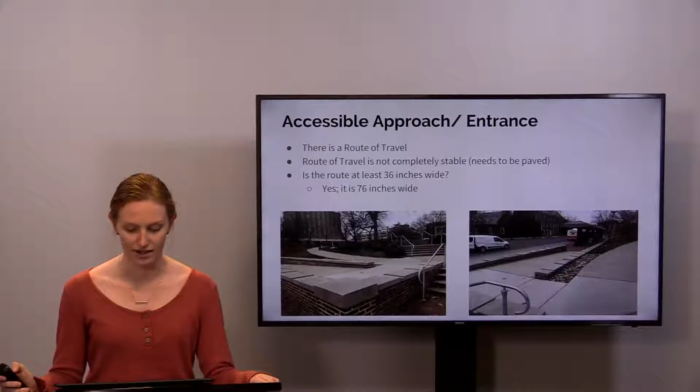First, we started with the accessible approach and the entrance, and there's a route of travel, and the route of travel is not completely stable and actually needs to be paved. The route of travel needed to be at least 36 inches wide, and this route of travel was actually 76. There are no stairs at the main entrance, so there was no need for a ramp.

There's no alternate entrance because the main entrance is accessible, and the entrance door needed to have at least 32 inches of clear opening, which it did, and it actually had 35. There's 30 inches of clear wall space on the pull side of the door, and it requires at least 18 inches. So they all worked.

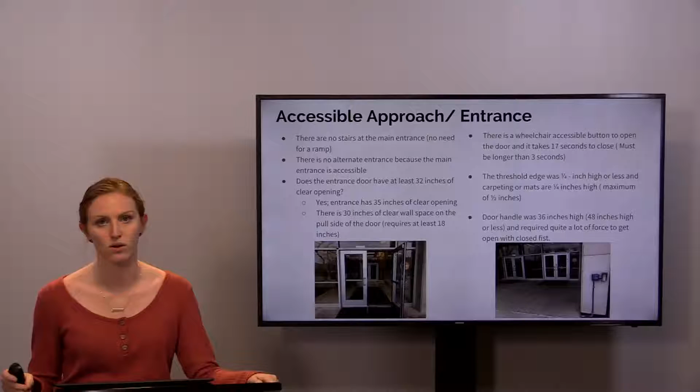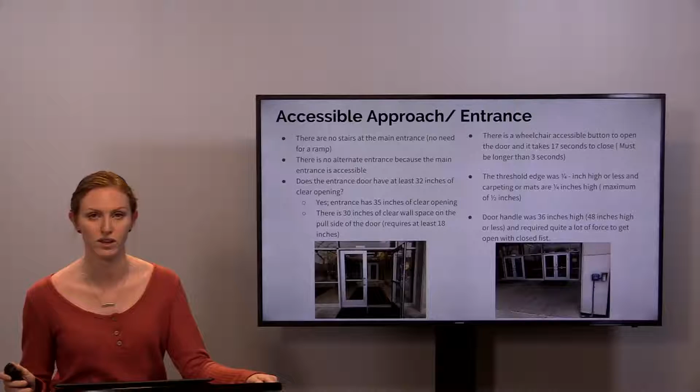There is a wheelchair accessible button to open the door, and it takes 17 seconds to close, and it had to be longer than 3 seconds, so that was really good. The threshold edge was 1/4 inch high or less, and carpeting or mats were 1/4 inches high, and the maximum was going to be 1/2.

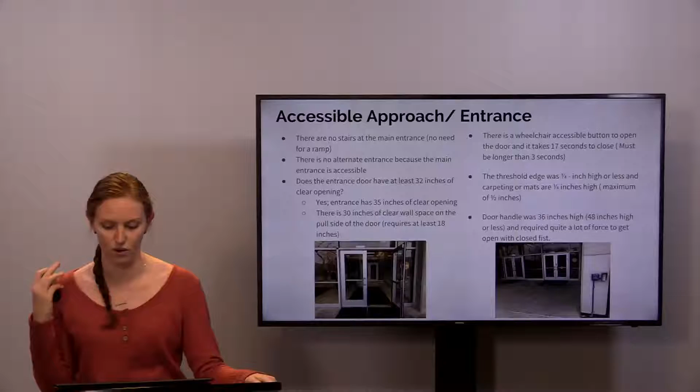So the door handle was 36 inches high, 48 inches high or less, and required quite a lot of force to get open with a closed fist.

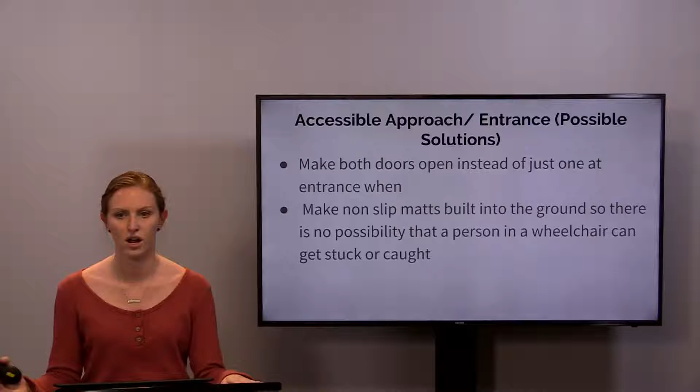Possible solutions to the problems that I faced was to make both doors open instead of just one entrance when you enter. And also, I thought to make the non-slip mats built into the ground so that there's no possible way that someone using a wheelchair could slip or get caught onto the mats.

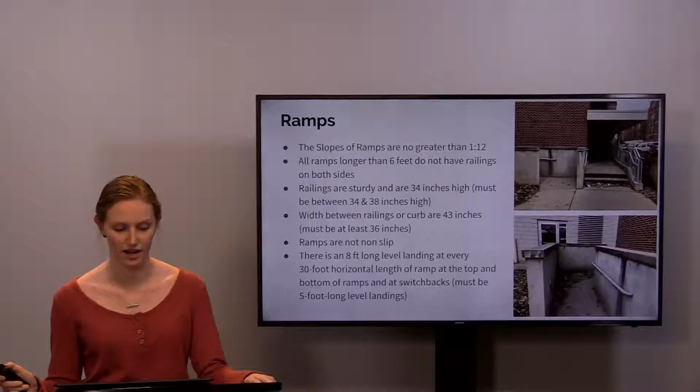The ramps were actually located when you first came in, and there was also one to get into the parking garage, and the slopes of ramps are at no greater than 1/12. All ramps longer than 6 feet do not have railings on both sides, and the railings were sturdy and are 34 inches high, and they had to have been between 34 and 38 inches high, so that met those requirements.

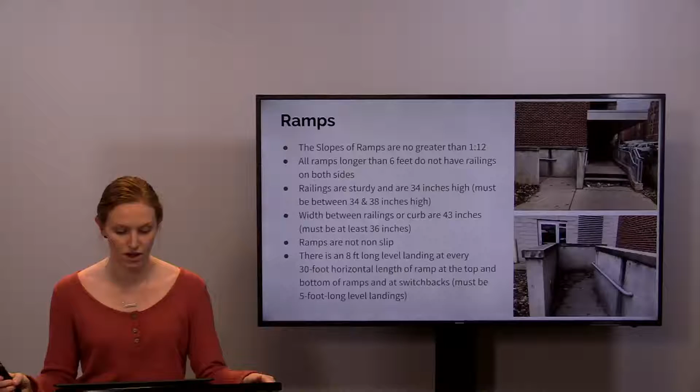The width between railings or curb are 43 inches, and they must be at least 36 inches. So those also met the requirements. The ramps are not non-slip, and there's an 8-foot long level landing at every 30-foot horizontal length of ramp at the top and bottom of ramps and at switchbacks, and they must be 5-foot long level landings, so that also met the requirements.

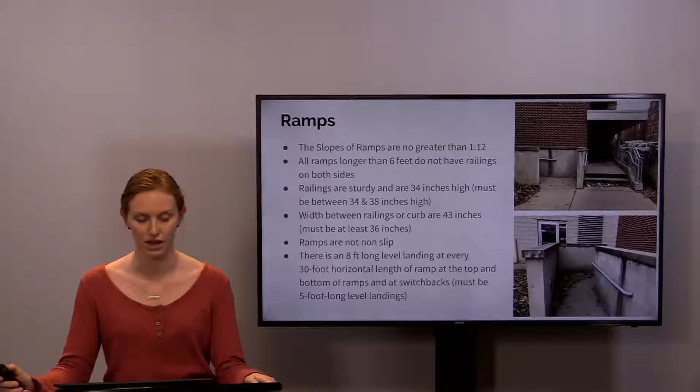The possible solutions that I found for these ramps were to add non-slip surface material that would still be good for different outdoor weather conditions, such as if it were to snow and get slippery or there would be ice. Those ramps would not be good because there's no way for someone who was using a wheelchair or a cane to not slip.

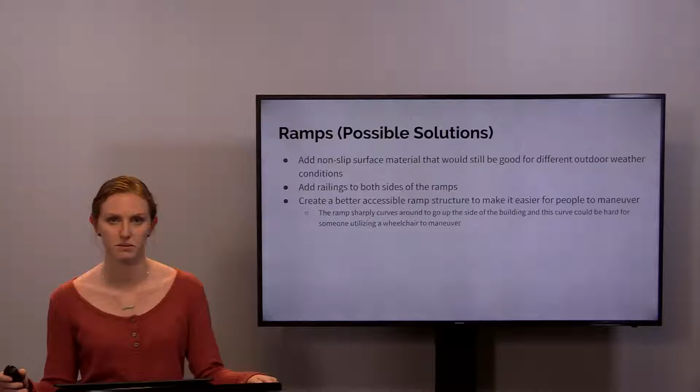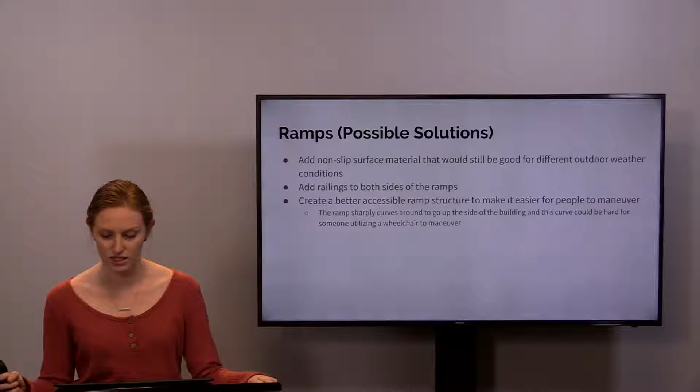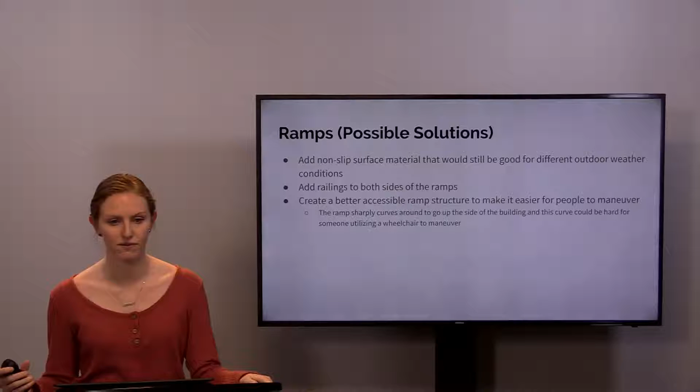I also suggested to add railings to both sides of the ramps because there was only one side that had railings, and I also suggested creating a better accessible ramp structure to make it easier for people to maneuver, because the way that the ramp was built was that it sharply curved at two different times, and I feel as though for someone using a wheelchair, this would be very difficult to maneuver.

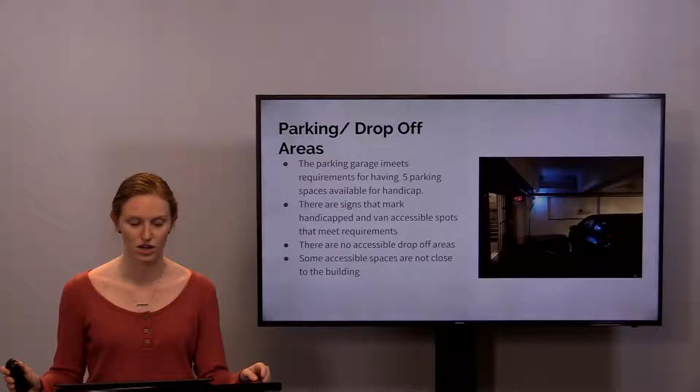The parking and drop-off areas. The parking garage meets requirements for having 5 parking spaces available for handicap. There are signs that mark handicap and van accessible spots that meet the requirements, and there are no accessible drop-off areas. Some accessible spaces are not close to the building, though, which would make it difficult for someone using a wheelchair or someone who is handicapped.

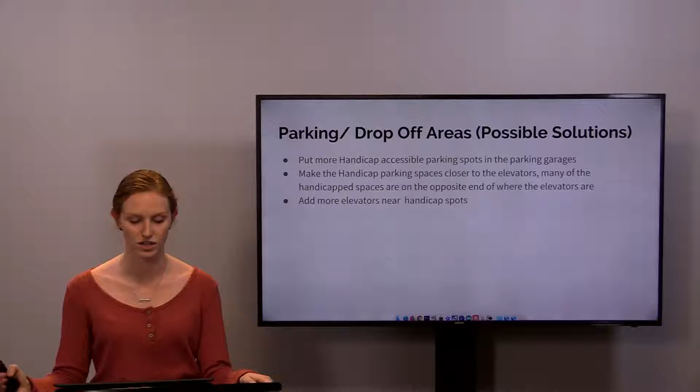The possible solutions I found for this is to put more handicap accessible parking spots in the parking garages and to make the handicap parking spaces closer to the elevators, because many of those spaces were actually quite far from the elevators, and I also feel as though if they can't do that, then add more elevators.

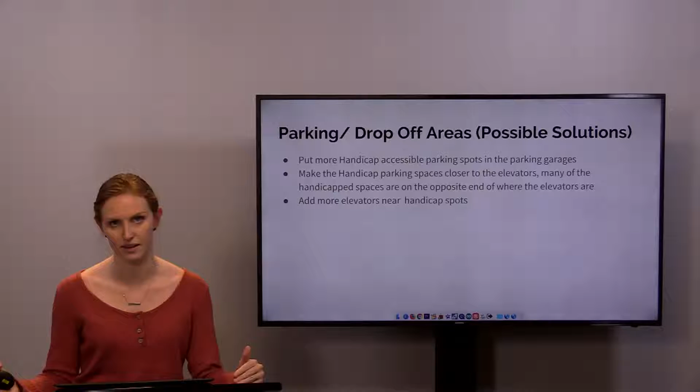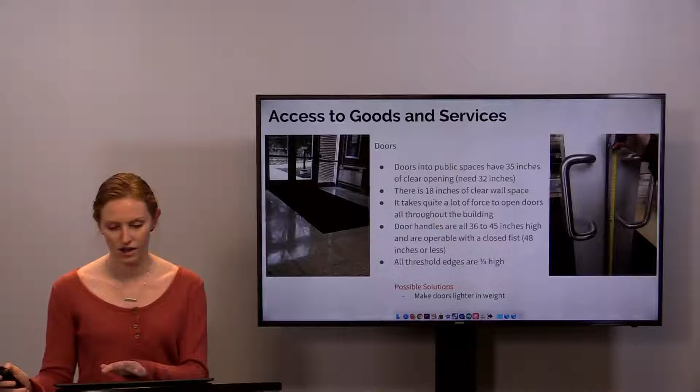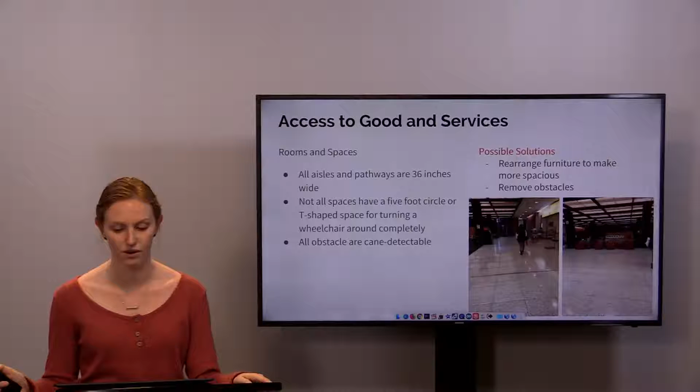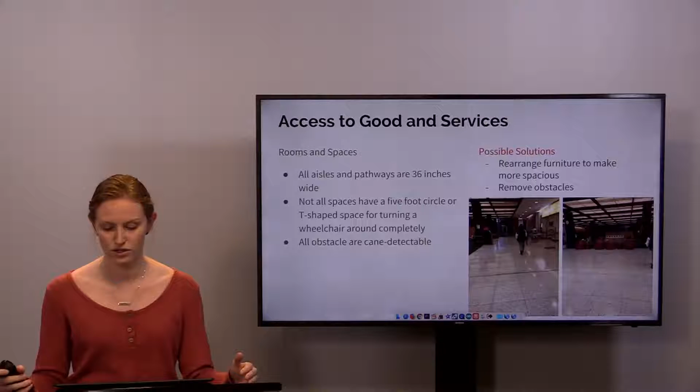The rooms and spaces: all aisles and pathways are 36 inches wide. Not all spaces have a 5-foot circle or T-shaped space for turning a wheelchair around completely, especially in the sitting areas. There really wasn't much room at all for that. All obstacles are cane detectable though. Possible solutions that I found for this were rearranging furniture to make it more spacious, and also removing some obstacles in the room and the space to make it easier for someone to maneuver in there.

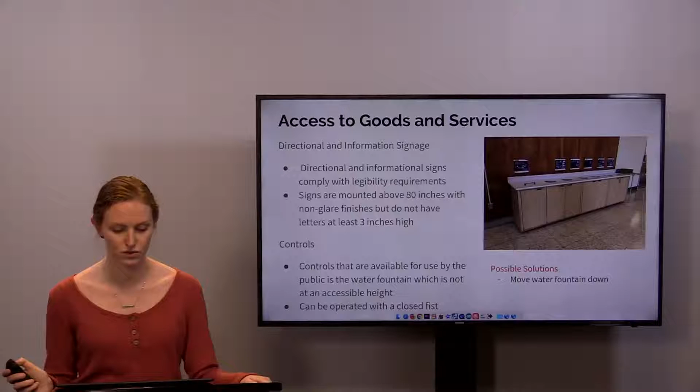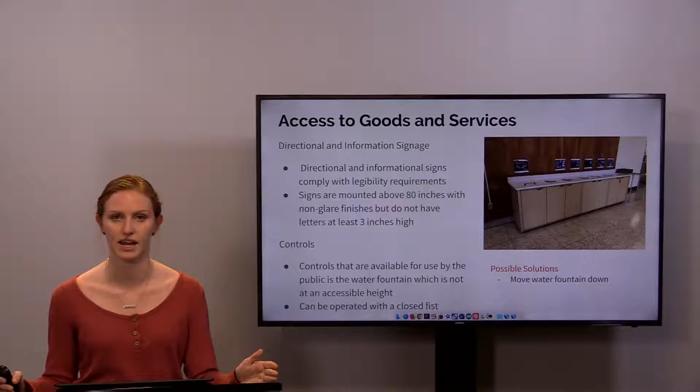Directional and information signage. Directional and informational signs comply with legibility requirements. Signs are mounted above 80 inches with non-glare finishes, but they did not have letters at least 3 inches high. Controls available for use by the public included the water fountain, which was not at an accessible height, but it could be operated with a closed fist. My possible solutions were to move the water fountain down, and also to change the signs and make them more in line with the requirements.

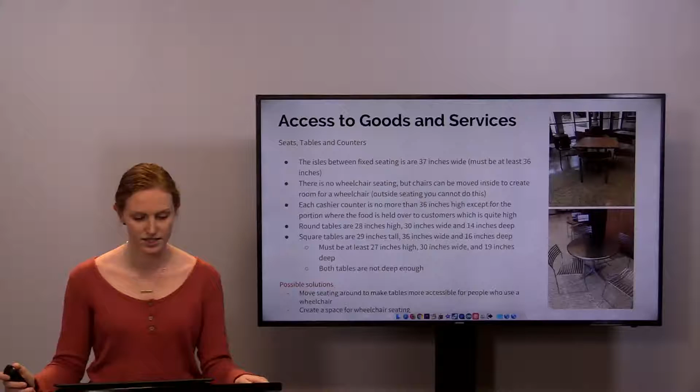The seats, tables, and counters. The aisles between fixed seating are 37 inches wide, and they had to be at least 36 inches, so it just met the requirements. There is no wheelchair seating, but chairs can be moved inside to create room for a wheelchair. Outside seating, you can't do this at all, so the outside seating wasn't wheelchair accessible, because you can't move the chairs. Each cashier counter is no more than 36 inches high, except for the portion where the food is handed over to the customers, which was quite high.

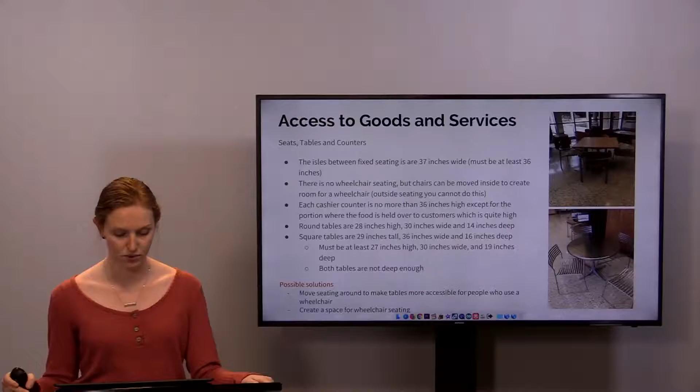Round tables are 28 inches high, 30 inches wide, and 14 inches deep, whereas the square tables were 29 inches tall, 36 inches wide, and 16 inches deep. Both met the requirements for height and width, but neither met the requirement for depth, which had to be 19 inches; one was 14 and one was 16. So both tables were not deep enough. The possible solutions I came up with were moving the seating around to make tables more accessible for people who use a wheelchair, and creating a space for wheelchair seating so that they also have a place to sit.

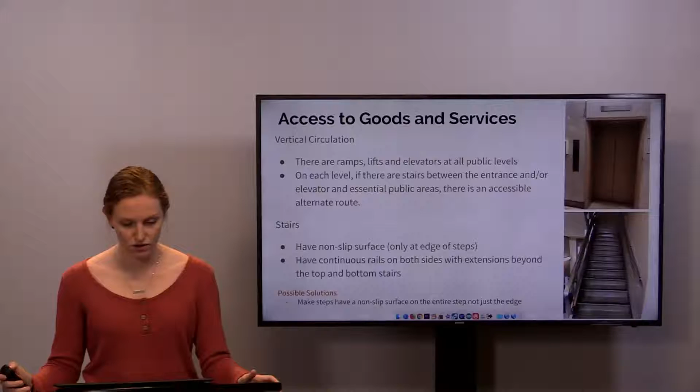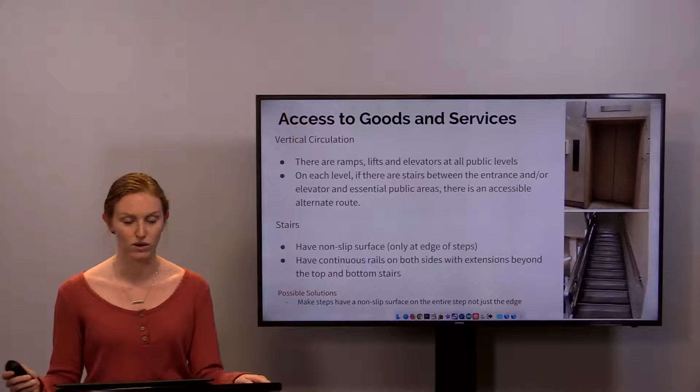Vertical circulation. There are ramps, lifts, and elevators at all public levels. On each level, if there are stairs between the entrance and/or elevator and essential public areas, there is an accessible alternate route. The stairs have a non-slip surface only at the edge of the steps, and they have continuous rails on both sides with extensions beyond the top and bottom stairs. So that also met requirements. But my possible solution was to make the steps have a non-slip surface on the entire step and not just on the edge.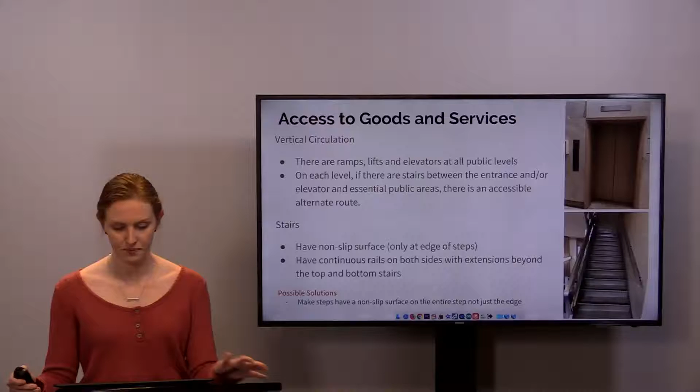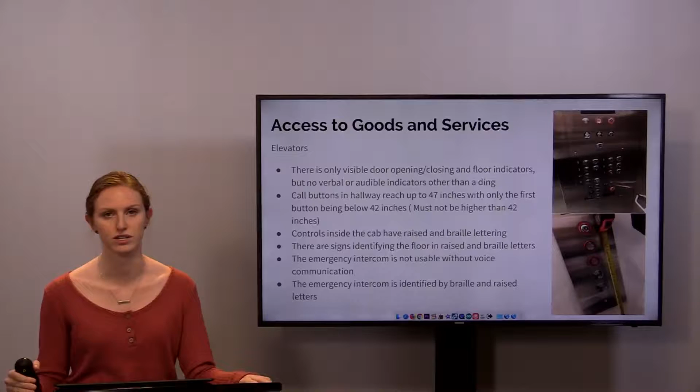For the elevators, there are only visible door opening and closing and floor indicators, but no verbal or audible indicators other than a ding when you reach a floor. The call buttons in the hallway reach up to 47 inches, with only the first button below 42 inches, but to meet the requirements they must not be higher than 42 inches. So someone using a wheelchair would not be able to reach the top buttons easily.

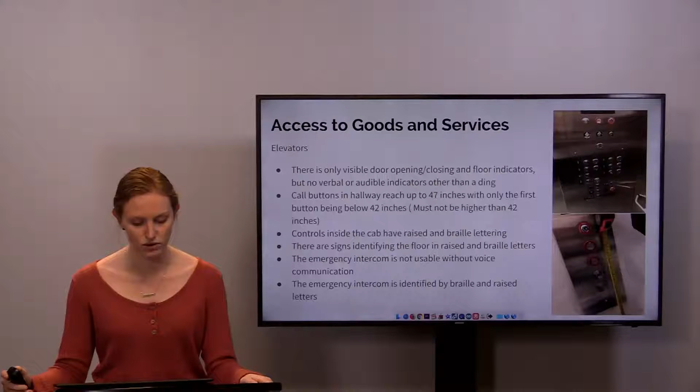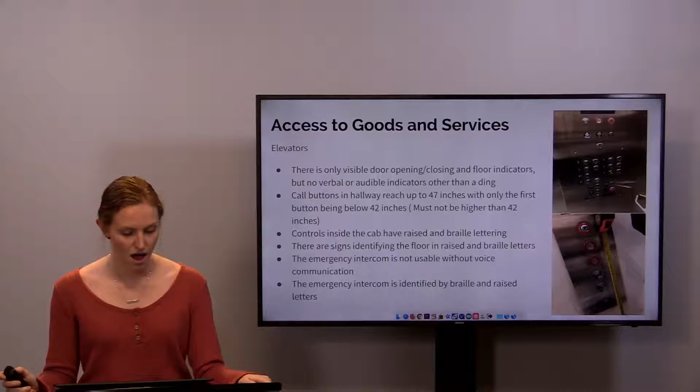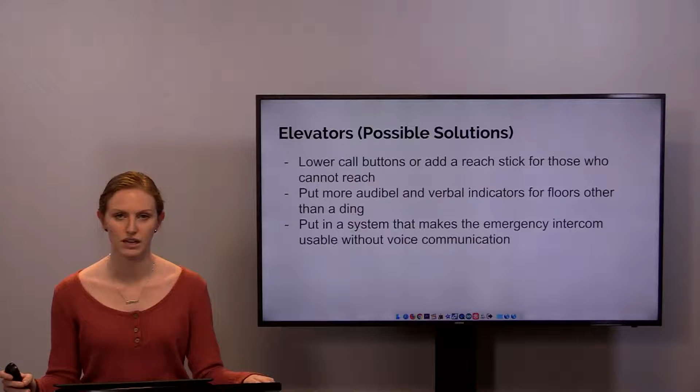The emergency intercom is not usable without voice communication, and the emergency intercom is identified by Braille and raised letters. The possible solutions that I did come up with for these were to lower the call buttons or even just add something like a reach stick for those who cannot reach the top buttons.

I also suggested to put more audible and verbal indicators for floors other than just a ding, so that if somebody who is using the elevator was a person who is deaf or a person who is blind, they would be able to know what level they are on without having to see or hear it. Put in a system that makes the emergency intercom usable without voice communication. I was suggesting using some type of video recording or iPad so that somebody would be able to communicate without using their voice.

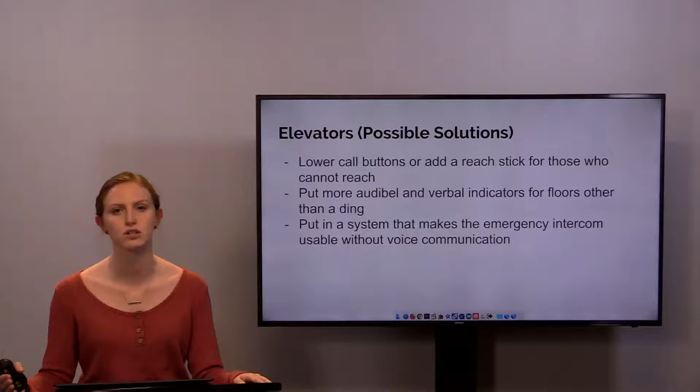Usability of restrooms. So getting into the restrooms was available to the public, but they were not fully accessible for a person who uses a wheelchair. The doorways and passages, there are tactile signage identifying the restrooms. Pathways are only 32 inches and they must be 36 inches for a person who uses a wheelchair, so those were not met. Pictograms are used to identify restrooms, and raised lettering and Braille were also included below them.

And no handles on outside of the door and inside. There was no handle on the outside of the door, and the inside of the door was accessible at 38 inches high and can be operable with a closed fist. Possible solutions were to make the passageways to the handicap accessible bathroom wider.

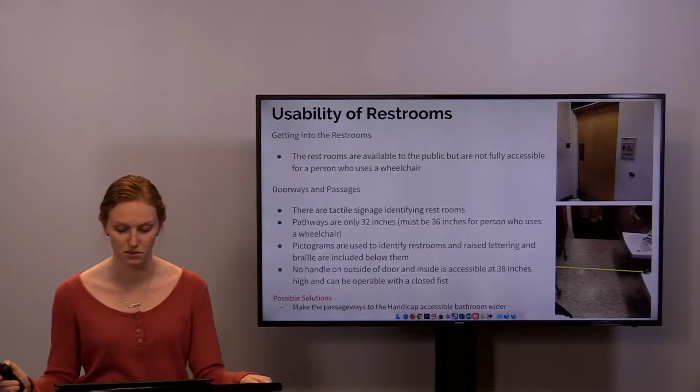The stall door is operable with a closed fist. There is a wheelchair accessible stall that has an area of at least 5 feet by 5 feet clear of the door swing. There are grab bars behind and on the side of the wall nearest to the toilet, and the toilet seat is 18 inches high, which had to be between 17 and 19 inches high, so it made the requirements. The lavatories, handicap accessible stalls, have 30 inches by 48 inches of clear space in front.

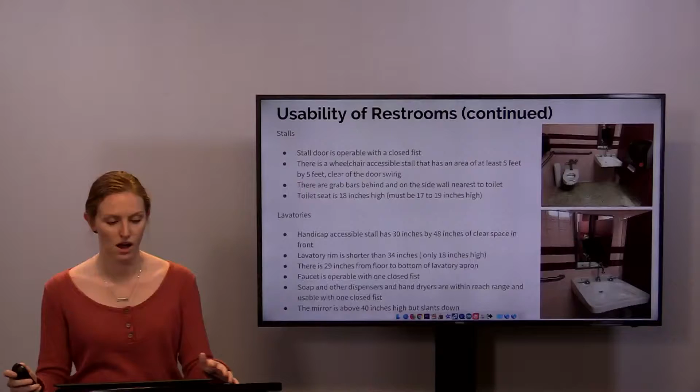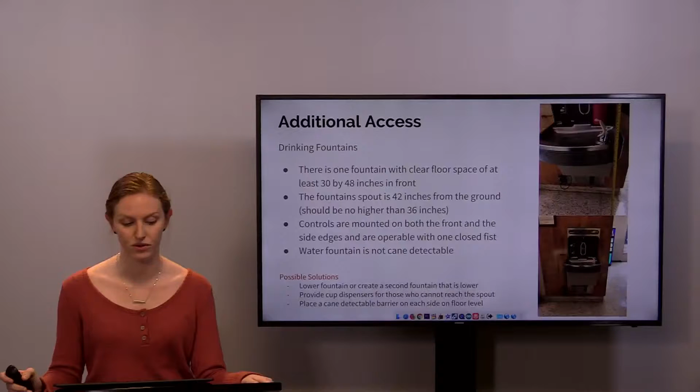Additional access I found were the drinking fountains. There is one fountain with clear floor space of at least 30 by 48 inches in front. The fountain spout is 42 inches from the ground and should be no higher than 36, so it was far too high. Controls are mounted on both the front and the side edges and are operable with one closed fist because all you have to do is press it. Water fountain is not cane detectable though.

The possible solutions that I found for this were to lower the fountain or create a second fountain that is lower and handicap accessible. Provide cup dispensers for those who cannot reach the spout. And I also suggested to place a cane detectable barrier on each side on floor level so that people who use a cane would be able to detect it easily.

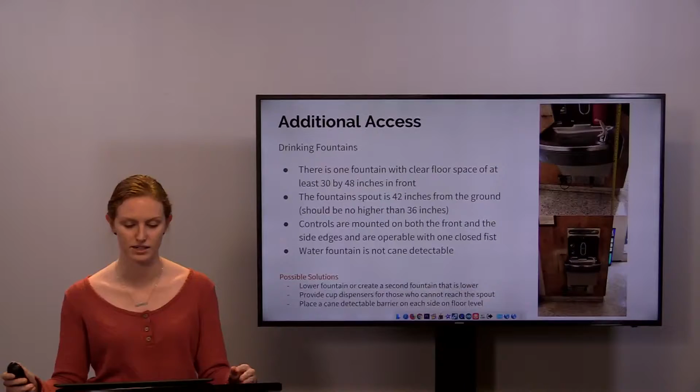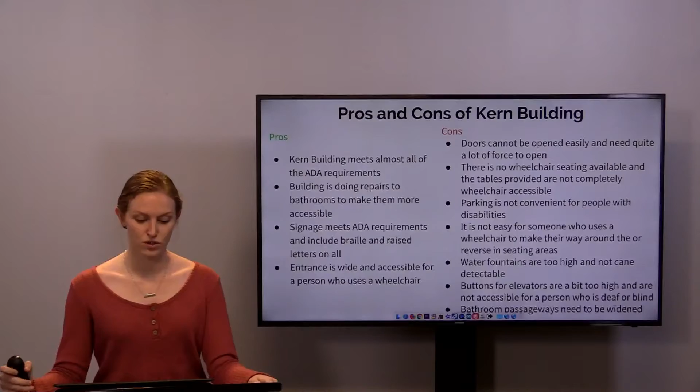The pros and cons of the Kern Building that I found were the pros that the Kern Building meets almost all of the ADA requirements. The building is doing repairs to the bathroom to make them more accessible soon. I talked to a worker in the bathroom when I was doing my measurements, and she said that they were redoing the bathroom so that it would be easier for a person using a wheelchair to get to the bathroom and be able to use it comfortably. The signage meets ADA requirements and includes Braille and raised letters on all of the signage, and the entrance is wide and accessible for a person who uses a wheelchair.

Cons, the doors cannot be opened easily and need quite a lot of force to open. So even if they do pass the closed fist test, it required so much force that it would still be difficult. There's no wheelchair seating available, and the tables provided are not completely wheelchair accessible. The parking is not convenient for people with disabilities, and it is not easy for someone who uses a wheelchair to make their way around or reverse in the seating areas all throughout the building.

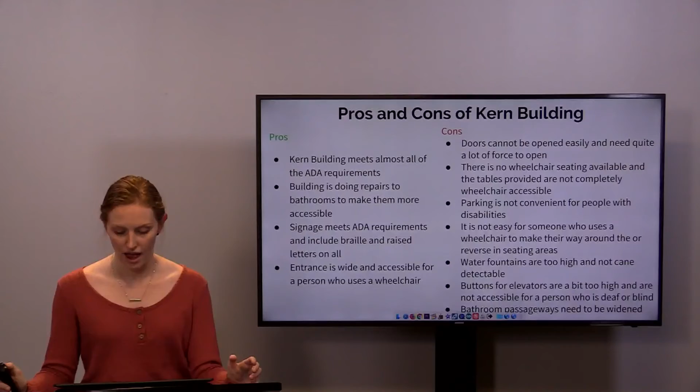The water fountains are too high and not cane detectable, and buttons for elevators are a bit too high and are not accessible for a person who is blind or deaf. The bathroom passageways also need to be widened, which I hope will be changed when they do the changes to the bathroom.